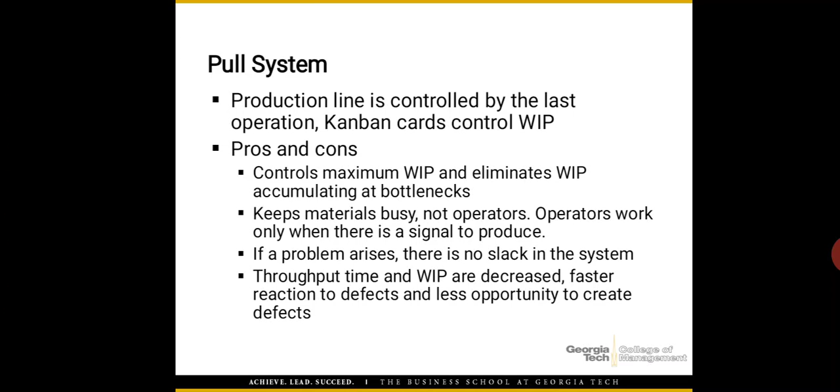ફીચર ઓફ લીન મેન્યુફેક્ચરિંગ, બરાબર, ફીચર ડિસ્ક્રાઇબ કરેલા છે. That includes, first, what is it, what do you mean by lean production, lean manufacturing? It is a management philosophy. Second thing, it is purely based on pull system throughout the plant, right. Next, what it does: it attacks waste, it tries to reduce cost in your plant. Second thing, it exposes problems and bottlenecks, right. They try to identify problems and try to solve them, right.

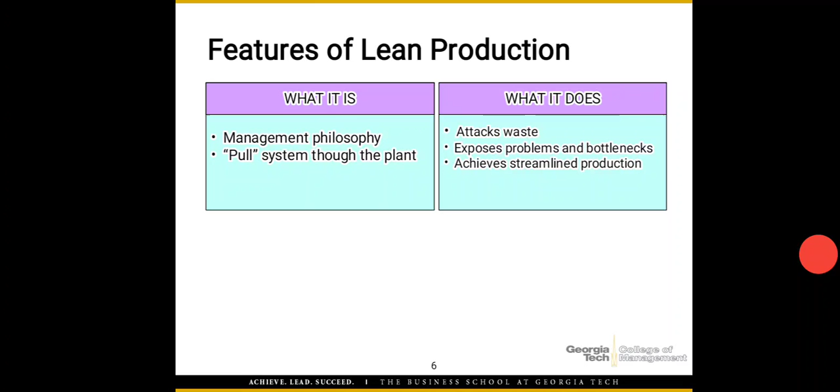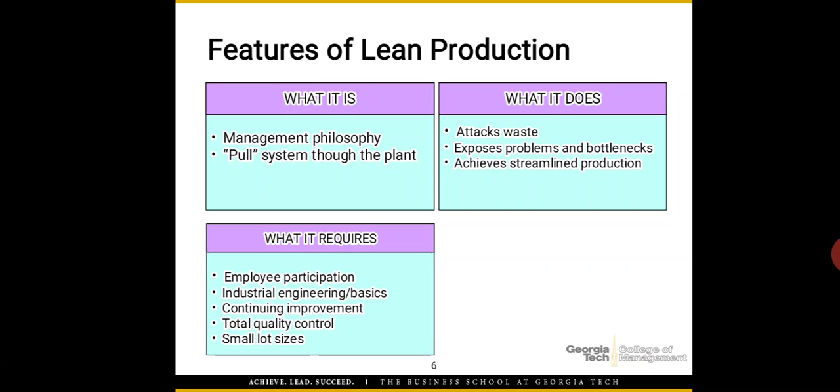Next thing, achieve streamlined production, continuous production without any interruption. What it requires: if we want to implement lean production, then what is the requirement for us? That includes employee participation is a must, industrial engineering is a must, continuous improvement is required, total quality control is a must, and we have to produce all the things in a small lot size. We have to place orders in a small size, as well as deliver a product in a small size. It's called Kaizen, continuous improvement. What does it assume? It assumes a stable business environment, stable production, right?

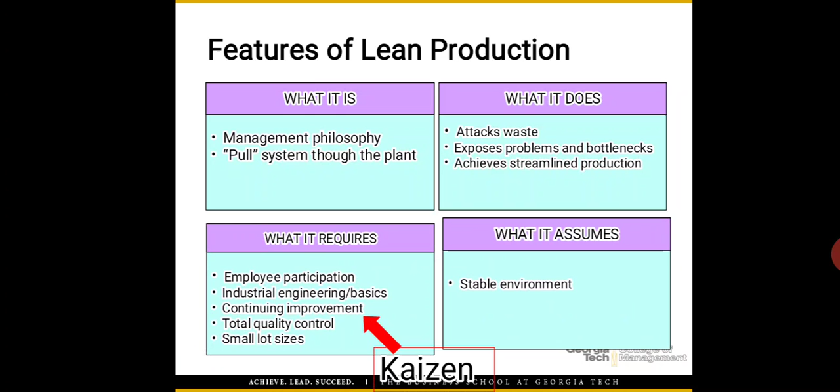A little history of lean manufacturing. Basically, the lean manufacturing system was designed by the Ford production system.

Start with an article that suits and then study to find some way of eliminating the entirely useless part. This applies to everything: a shoe, a dress, a house, a piece of machinery, a railroad, a steamship, an aeroplane. As we cut out useless parts and simplify necessary ones, we also cut down the cost of making. But it is also to be remembered that all parts are designed so that they can be most easily made.

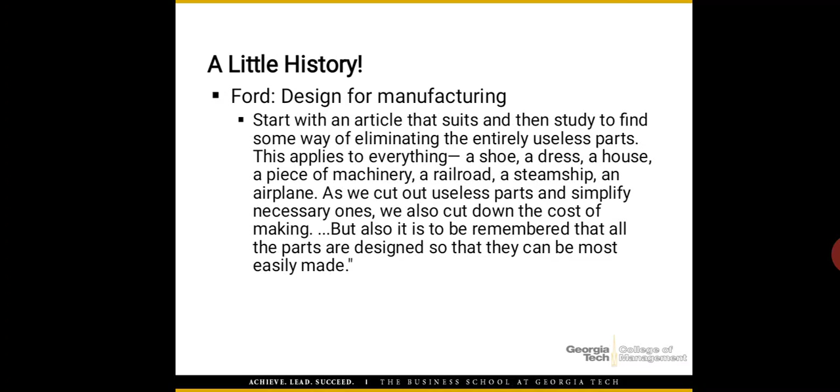This means a lean manufacturing system is applicable to every product, starting from a small shoe up to a big aeroplane as well as a steamship. But we have to focus on quality here. Just for the purpose of reducing cost, we cannot compromise with quality. So we have to design a product which is a standard one with standard quality.

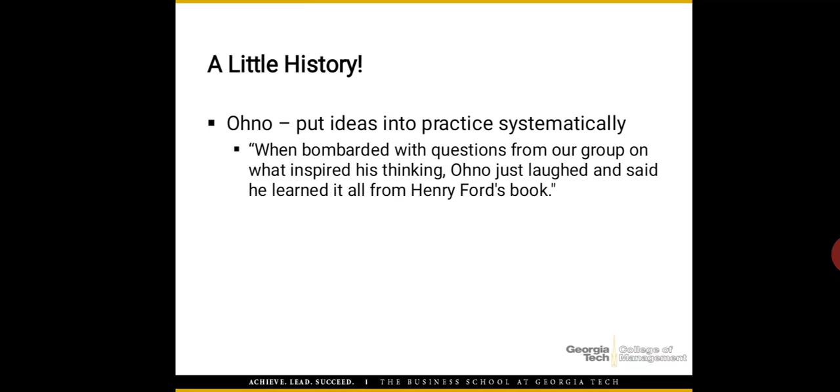Ohno says, put idea into practice systematically. When bombarded with questions from our group on what inspired his thinking, Ohno just laughed and said he learned it all from Henry Ford's book. So this means it was defined by Ford company.

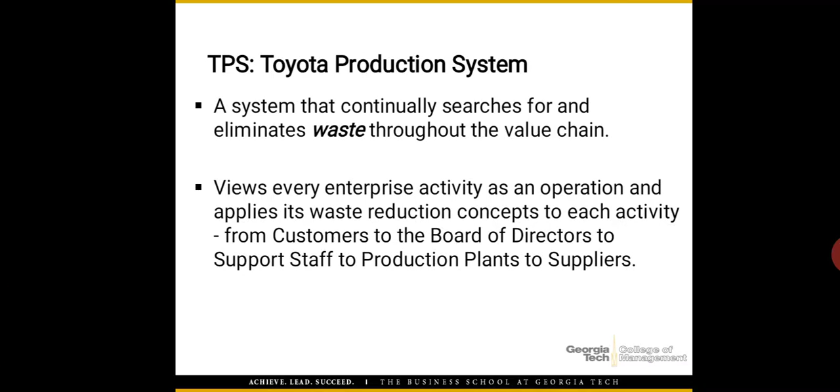The Toyota Production System, TPS, is also there, which is based on a system that continually searches for and eliminates waste throughout the value chain. Toyota Production System focuses on waste reduction through the whole value chain or value creation process - estimation and elimination of waste.

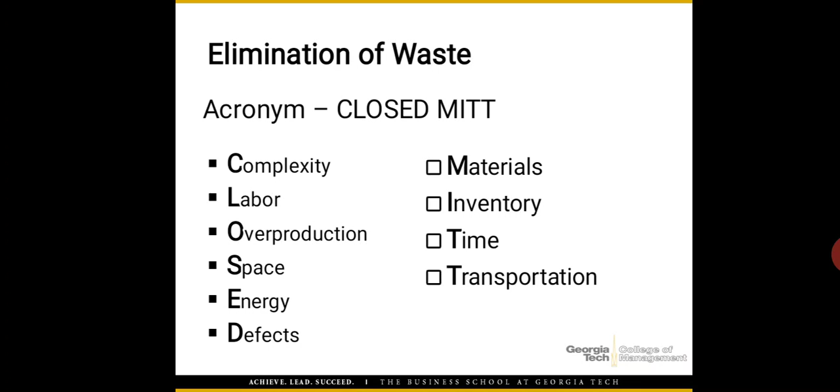One acronym is there: CLOSED MITT. C for complexity, L for labor, O for overproduction, S for space, E for energy, D for defect, M for material, I for inventory, T for time, and T for transportation. We have to reduce and eliminate waste from all of CLOSED MITT.

Waste in Japanese language is muda, it means waste.

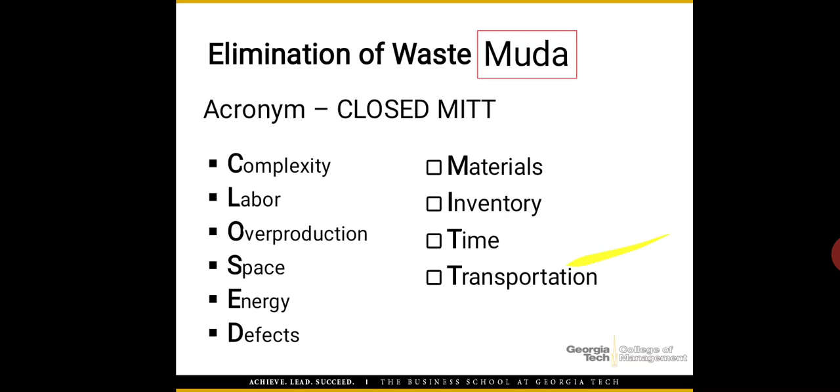We can eliminate waste through applying certain philosophies that include eight types. First, the 5S concept; second, group technology; third, quality at source; fourth, just in time production; fifth, Kanban production control system; sixth, minimizing setup time; seventh, uniform plant loading; and eighth, focus factory network.

These are the 8 techniques through which we are able to reduce waste. We will try to describe these 8 techniques in detail in our next PPT.

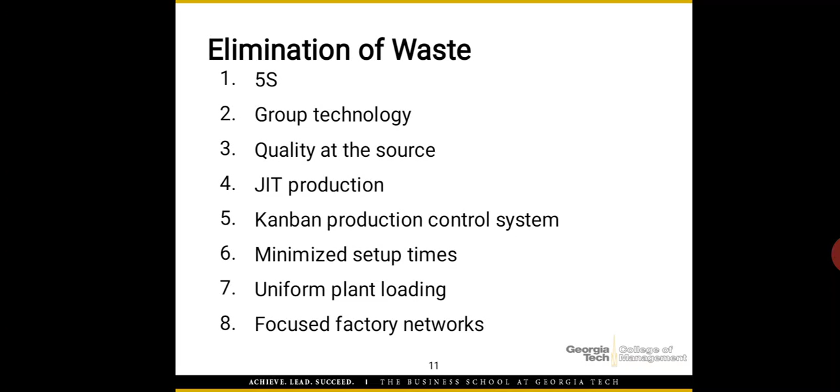The same 7 wastes are there, which we can recognize: first, waste of overproduction; waste of inventory; waste of waiting or time; waste of motion; waste of transportation; waste of rework; and waste of over processing.

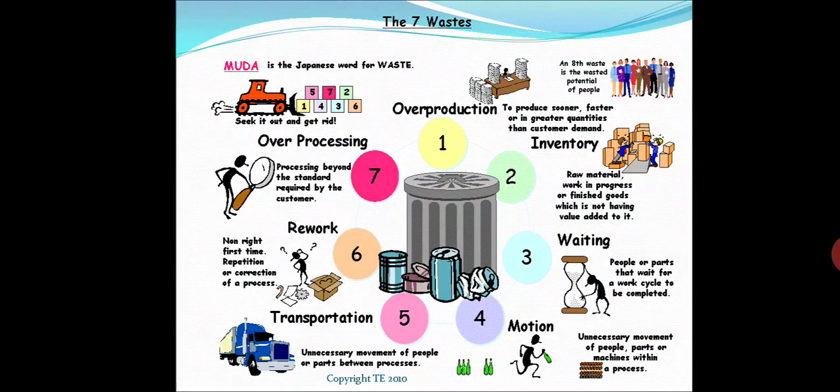First concept of waste elimination: the 5S concept. Here, 5 Japanese words are given which start with S: Seiri, Seiton, Seiso, Seiketsu, Shitsuke. Here we will try to translate these into English with their meaning.

First one, Seiri, it means proper arrangement. It's called - we have to sort it out. Seiton, it means orderliness. We have to simplify the whole operation of our production.

Seiso, it means cleanliness. We have to sweep away all the waste as well as dust and unnecessary material and waste. Seiketsu, it means clean up, standardization. We have to utilize a standard tool, standard method, standard technique for the purpose of conducting our production or operation.

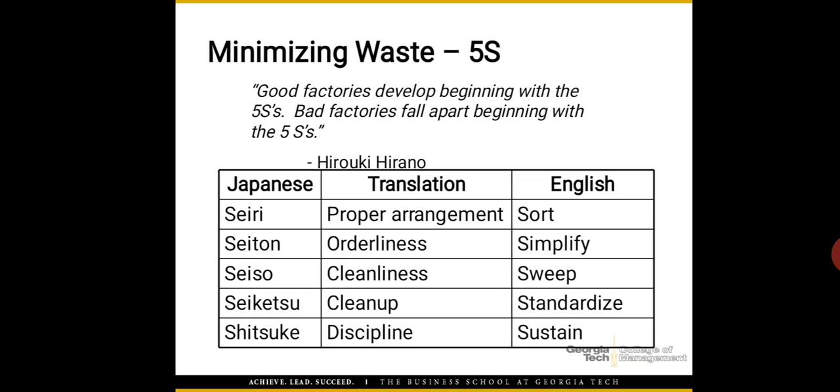Shitsuke, it means discipline, sustain. We have to implement the new concept permanently. We have to maintain all the discipline and rules and regulations as per our requirement for a longer period of time. It is called sustain, Shitsuke.

Next, group technology. Instead of arranging whole machinery according to our convenience, if we arrange machines in a particular order which minimizes time of loading, unloading, and time of movement, so we can reduce waste like motion waste and transportation waste.

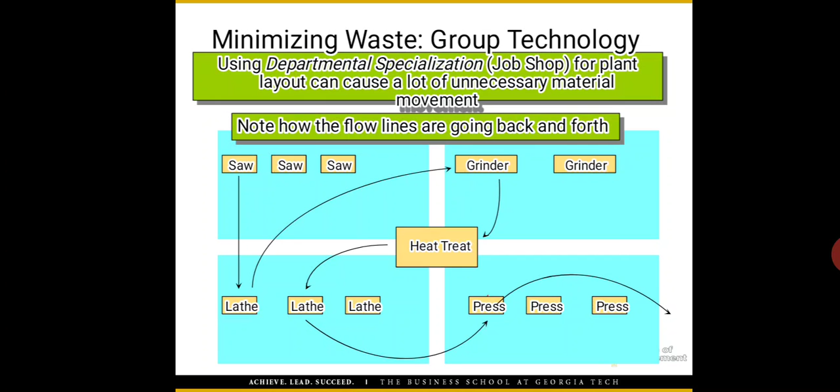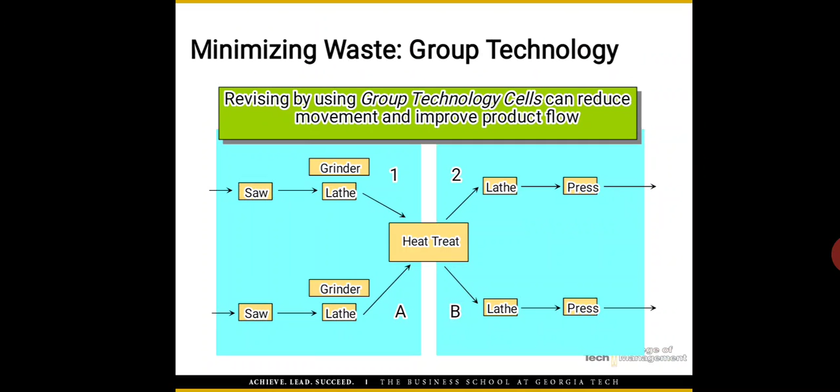Here you can see the image where we are arranging the machinery as per our convenience. Instead of this way, if we arrange the machinery in this sequence, we are able to reduce the total time or lead time which is taken for production.

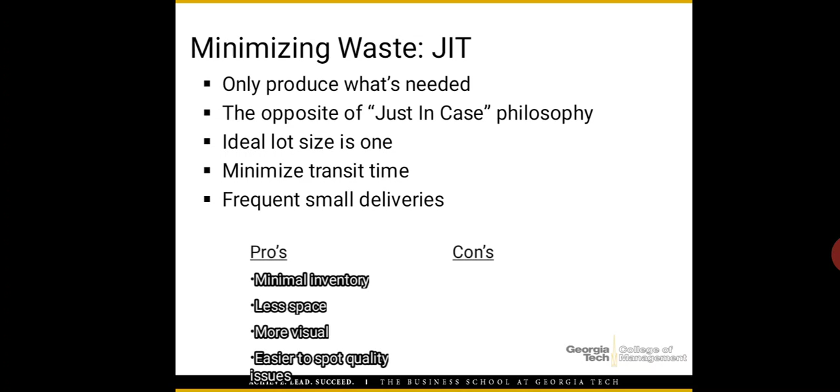Here are some pros and cons regarding just in time. Pros include minimum inventory required, less space required, more visualization of material, inventory and machinery, and easier to spot quality issues so we are able to easily solve them.

Cons include requiring discipline and standardized people. Second, it requires good problem solving ability in our manpower. Third, the supplier or warehouse must be close to our company.

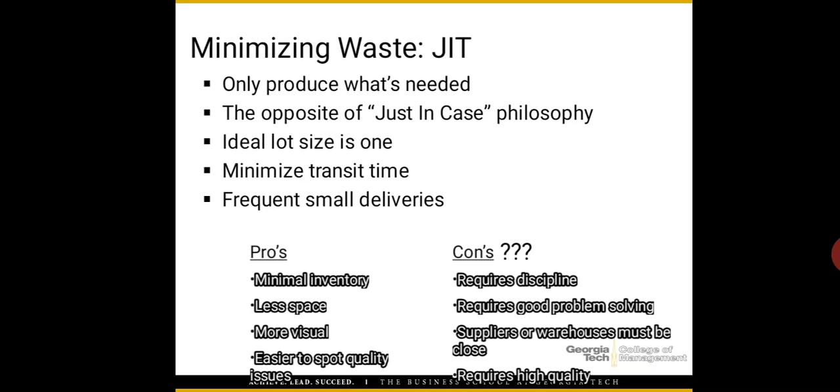Minimizing waste through quality at source means we have to maintain quality at every stage. If there is any possibility of defects, we have to recognize it and try to solve it. Do it right the first time, meaning we don't have to compromise at any stage. We have to create correct quality at every stage, call for help if required, and immediately stop the process and correct it versus passing it on to inspection or repair.

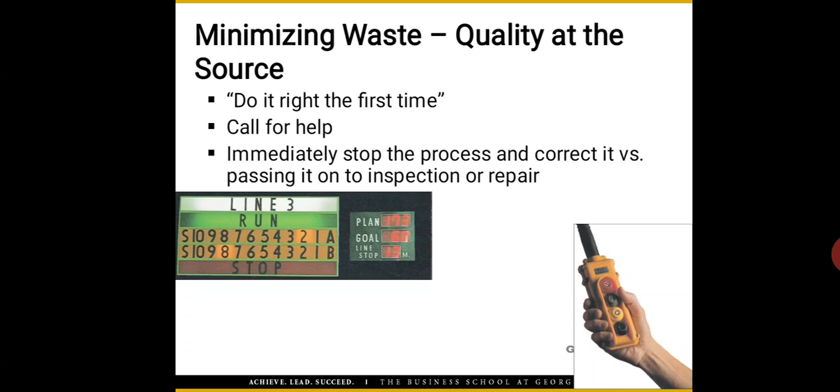It is called jidoka, defect detection.

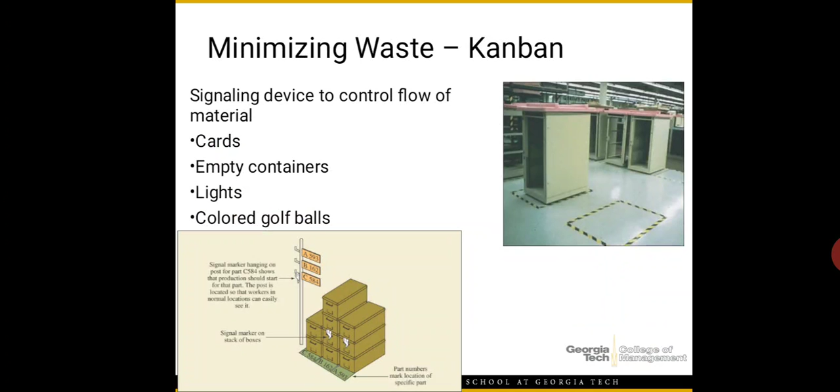Minimizing waste through the kanban system is also one important philosophy for waste minimization. Here we can utilize various types of indicators like golf balls, lights of different colors, or empty colorful containers, cards for the purpose of delivering and receiving inventory. It is called the kanban system.

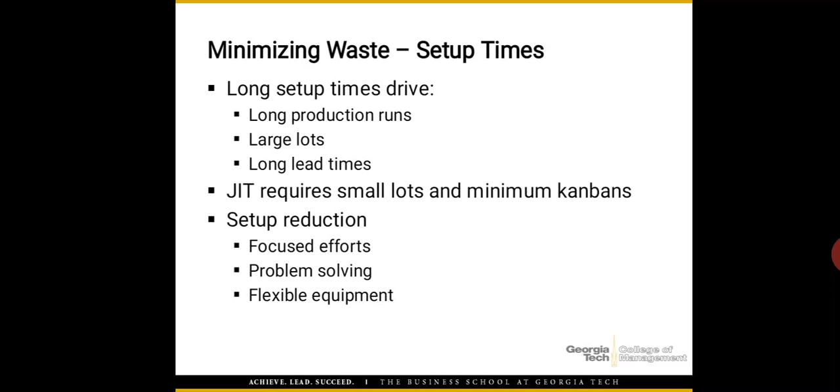Minimizing waste through setup time reduction. For example, a long setup time drives long production runs, large lot size of inventory, and long lead time for production. But if we simplify or minimize setup time, then we are able to get the benefit of focused efforts, problem solving ability, and flexible equipment.

Next, minimizing waste through uniform plant loading. Instead of producing a product or running a plant in a variable manner, if we set the level of production in an equal way, then we are able to reduce waste.

For example, here two examples are given with production numbers by month. In January 1200 units, in February 3500 units, in March 4300 units, totaling 9000 units produced by a company. But here we find the production of each month is varied.

In a second example, in January 3000, in February 3000, in March 3000. Here also the total is 9000, but in every month we are producing a standard 3000 units. This is called uniform plant loading, where production is uniform every month. If we follow uniform plant loading, we can reduce waste of manpower, machinery time, and material.

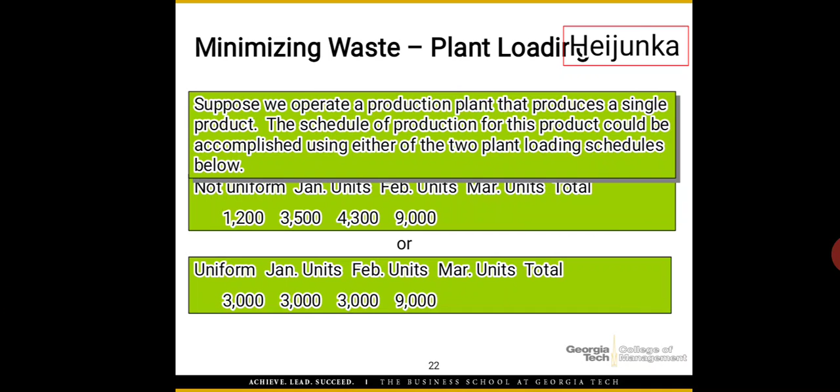Minimizing waste through focused factory network. If we select our location in a specialized area where all types of facilities, suppliers and customers are available, which is mandatory for our business, it reduces time to reach those suppliers and customers. This is called focus factory network. We have to set our factory where all necessary supporting firms are there, so we can reduce the transit time.

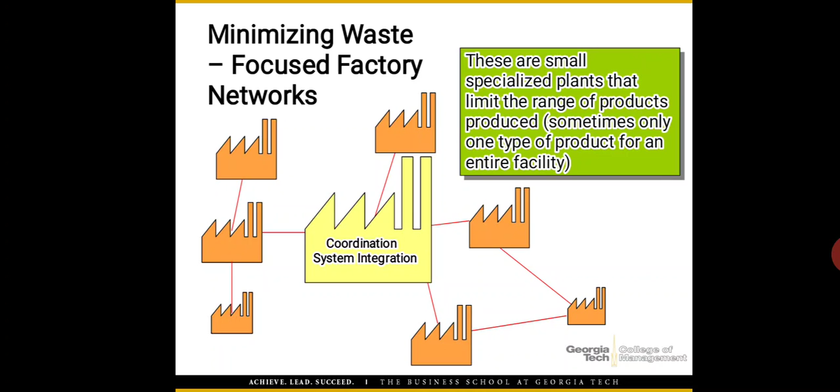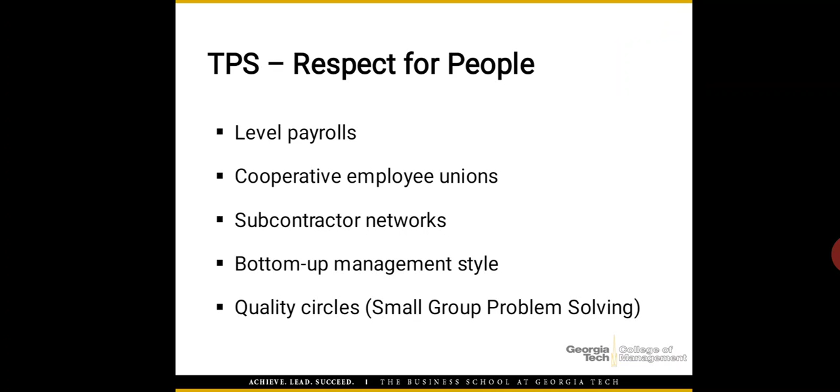Toyota production system focuses on respect for people, which includes level payroll, giving standard salary. Second, a cooperative and supportive employee union, subcontractor network, and a bottom up management style, meaning everybody can share their ideas with top level management. And quality circles, small groups of people for problem solving. So they are focusing on respect for people.